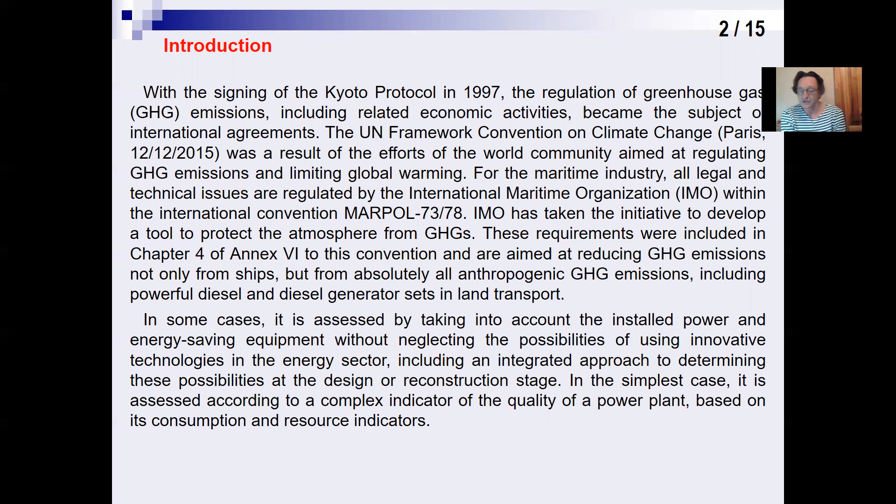Energy Efficiency Design Index of a Vehicle Power Plant. In accordance with the above Annex 6, it is recommended to take into account GHG emissions using the energy efficiency design indexes, which characterize the energy capability of a technical facility at the lowest cost of resources for energy generation.

It is assessed taking into account the installed power and energy-saving equipment, without neglecting the possibilities of using innovation technology in the energy sector, including an integrated approach to determining these possibilities at the design or reconstruction stage. It is a complex indicator of the quality of the power plant based on its consumption and resource indicators. This indicator you can see on this slide.

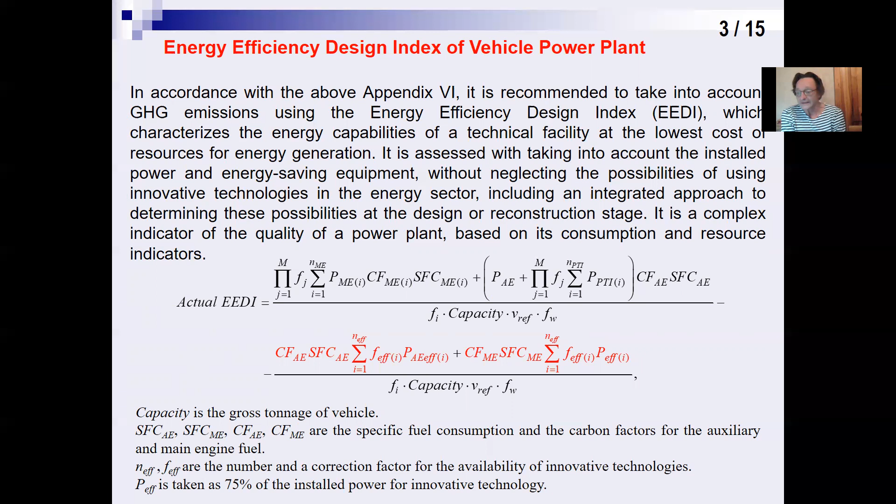Capacity is the gross tonnage of the vehicle. Other coefficients are the specific fuel consumption and the carbon factors for the auxiliary and main engine fuel. Other coefficients are the number and correction factor for the availability of innovation technologies.

There is growing interest in lowering operating costs for all types of autonomous power vehicles and reducing GHG emissions, including measures to ensure optimal use of the fuel used for the main engine. Following the trend for increasing the overall efficiency after the first oil crisis in 1973, the efficiency of the main engines has increased, and today it is about 50%.

This high value has led to low values of specific fuel consumption and accordingly to a low temperature of the exhaust gases after the turbochargers. Even though the energy efficiency of the fuel consumed, at 50%, is relatively high, the main challenge is still to further reduce operating costs and the overall fuel consumption. It can also lead to further reductions in CO2 emissions.

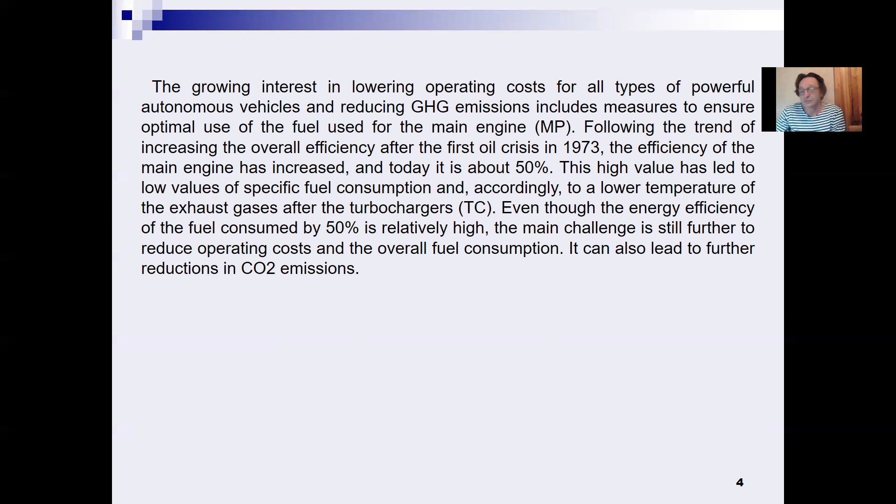Exhaust gas energy is the most attractive source of waste heat on a vehicle due to the intense heat flow at relatively high temperatures. One of the ways to improve efficiency is the use of a waste heat recovery system. For the main engine in combination with a waste heat recovery system, the overall efficiency increases to about 55%. The primary purpose of the waste heat recovery system is to convert exhaust gas energy into electrical energy for onboard consumers.

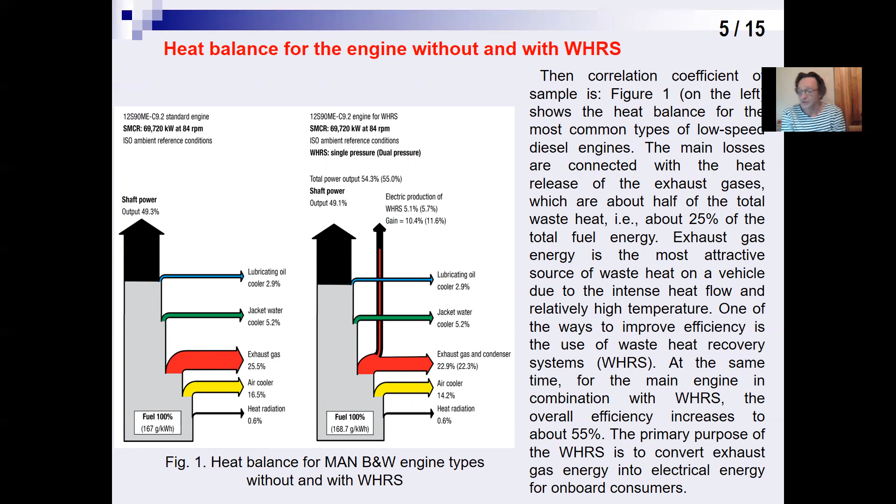The purpose of our research. The purpose of the work is to develop and substantiate the adequacy of this simplified method for determining the generating capacity of the heat recovery system for the main engines of sea vessels and powerful land vehicles.

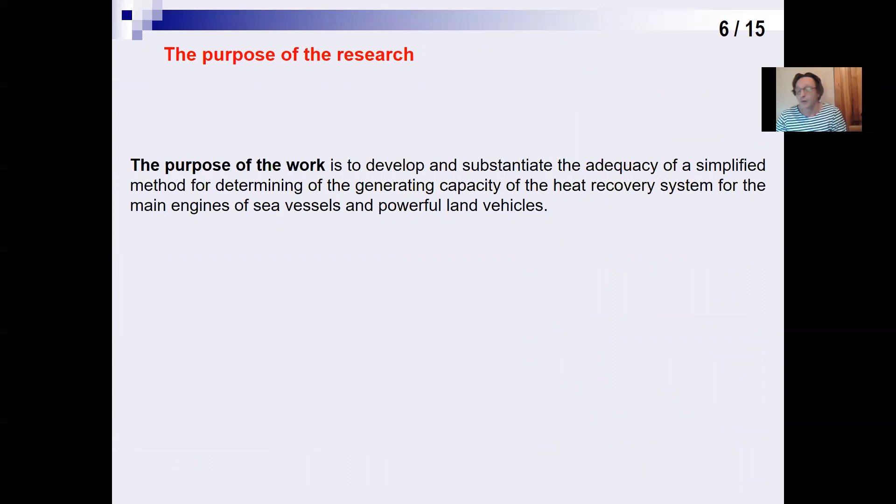Most of the exhaust gases from the exhaust manifold go to the turbocharger, which ensures the operation of the main engine, and the more minor part goes to the gas turbine, which drives the generator connected to it.

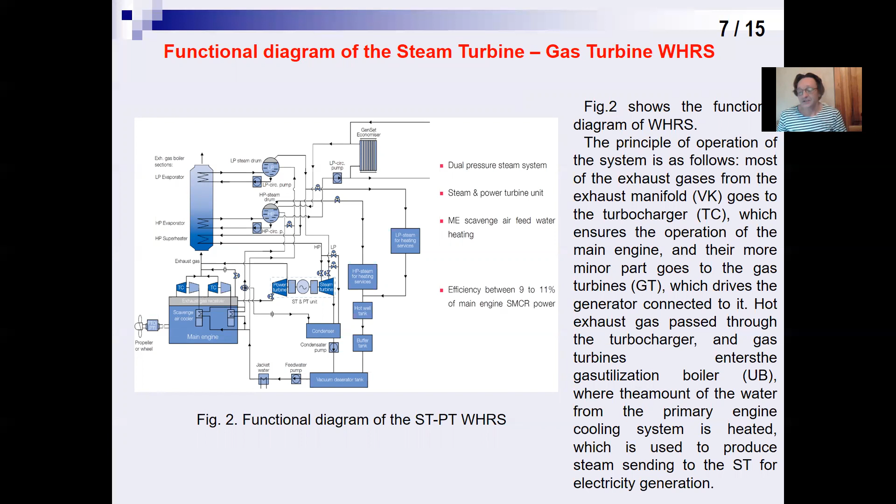Hot exhaust gas passes through the turbocharger and gas turbines and enters the gas utilization boiler, where water from the primary engine cooling system is heated, which is used to produce the steam sent for electricity generation, excuse me.

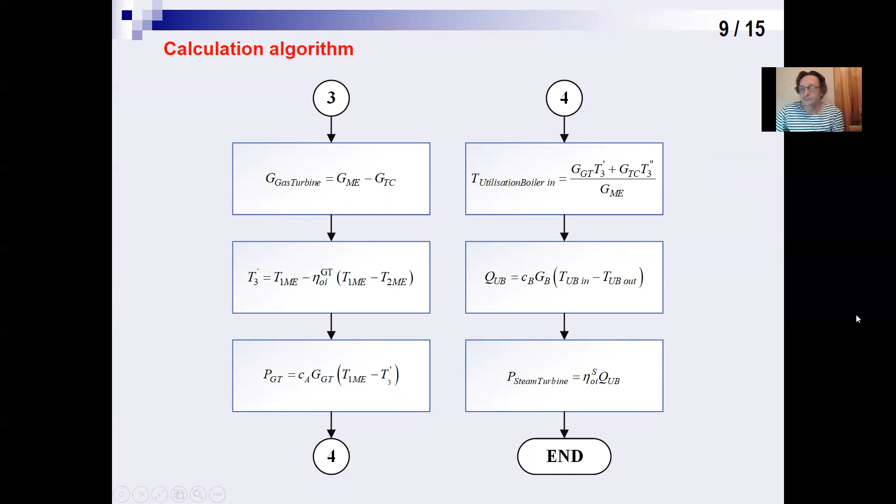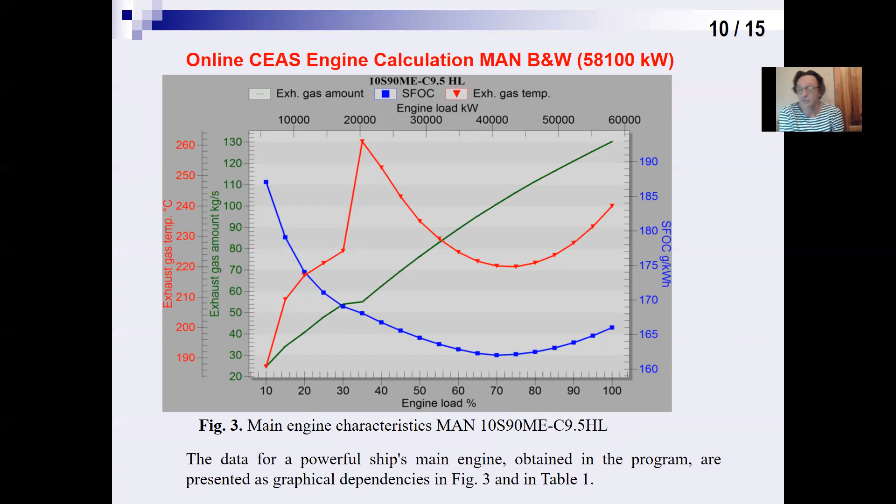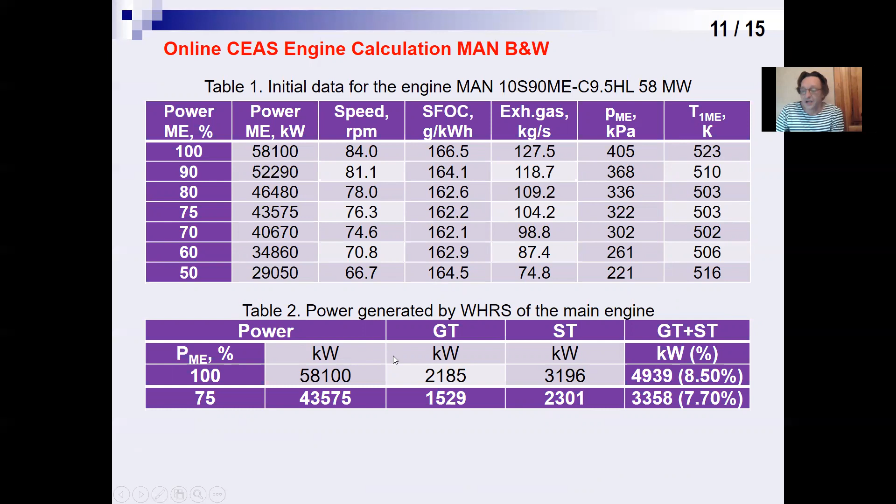The power generated by the different engine you can see on this slide. The result of our calculation. Figure 4 shows us the result of calculation as the generating power by the waste heat recovery system depending on the power of the main engine. This figure also compares the calculation results with the manufacturer passport data for a similar engine that you can see in the previous slide in table number 2.

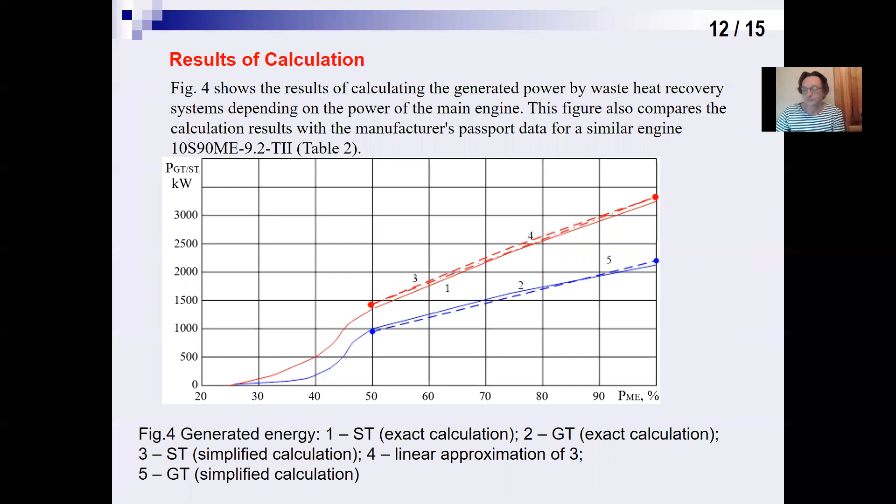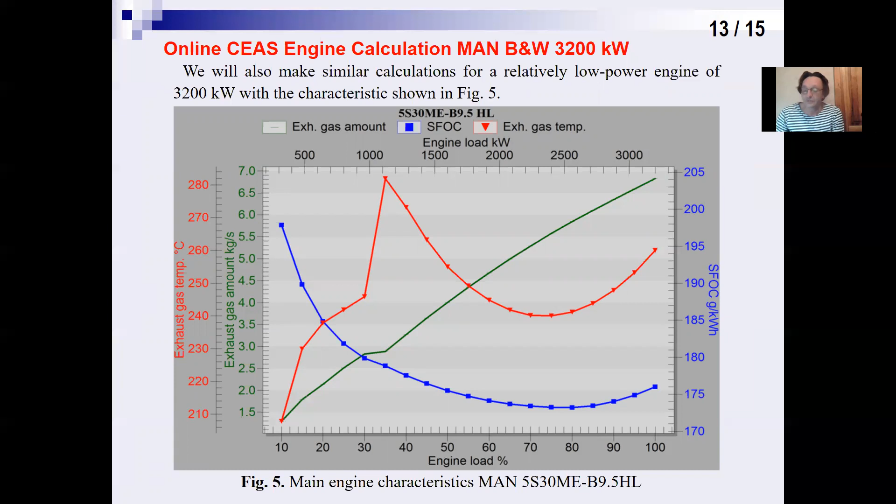On this slide, we can see the result of our calculation. We will also make a similar calculation for a relatively low power engine of 3,200 kilowatts with a characteristic that's shown in this figure. Result of our calculation. Based on the obtained data, the power diagrams of the steam and gas turbines were calculated, and this graphic you can see in figure number 6.

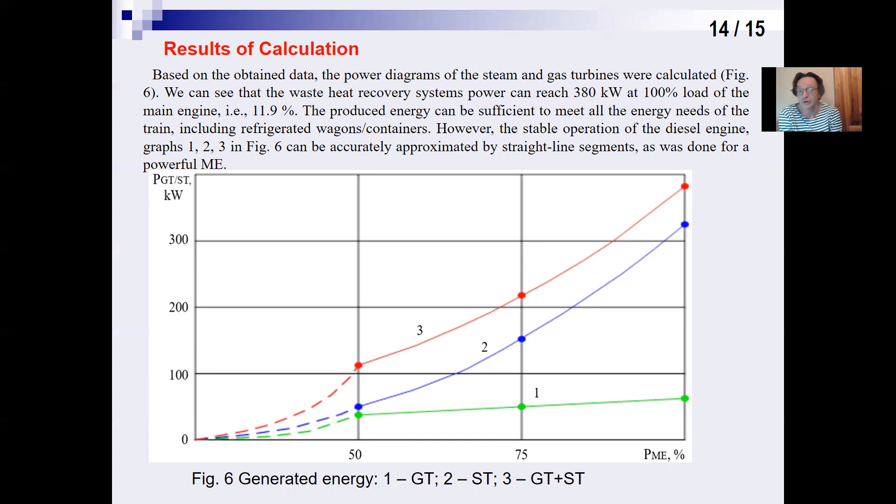We can see that the waste heat recovery system power can reach 380 kilowatts at 100% load of the main engine, that is equal to about 11.9%. The produced energy can be sufficient to meet all the energy needs of the train, including refrigerated wagons and containers. However, the stable operation of the diesel engine, graphs number 1, 2, and 3 in figure number 6, can be accurately approximated by straight line segments, as was done for a powerful main engine.

The conclusions. The expediency of using a waste heat recovery system is shown not only for powerful ship power systems, tens of megawatts, but also for installations of relatively low power from 1 to 3 megawatts, in particular in long trains and diesel locomotives. In addition, the proposed method for calculation of the power of the gas turbine generator as part of the waste heat recovery system does not require complex calculations and allows only 2 operating points to obtain the energy characteristic of the waste heat recovery system with an error of no more than 5%.

Second, a method has been proposed that makes it possible to determine the amount of energy generated by the waste heat recovery system in modes different from those given in the operating instructions for any type of main engine on which it is possible to install waste heat recovery systems. Third, using the proposed method, it is possible to determine the amount of energy produced separately by each type of turbine generator, steam or gas.